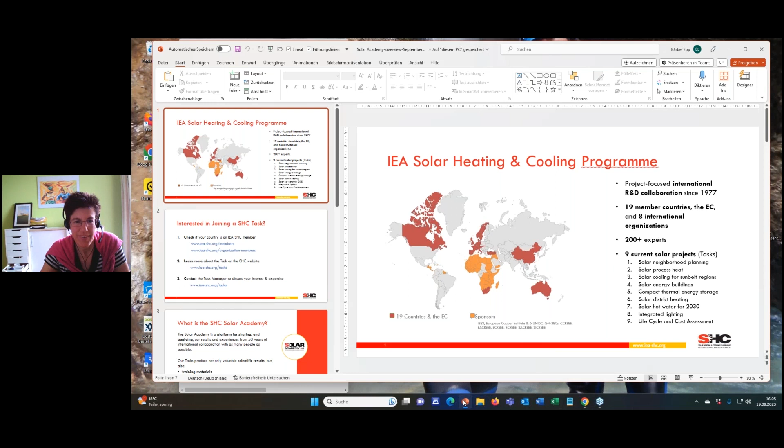Before we start with the real topic, I will give you a brief introduction into what is the IEA Solar Heating and Cooling Program. It's a fairly large international R&D collaboration program with 19 member countries and 8 international organizations. Around 200 experts, mostly researchers, but also from industry, group together and work on a number of subjects which are highly relevant for solar thermal. We have listed them here for you. It's solar neighborhood planning, solar process heat, solar cooling, as we have today, solar energy buildings, but also compact thermal storages. Solar district heating is a big topic, but also thermosiphon systems in the Asian world, integrated lighting, and life cycle and cost assessment.

So you see that we cover all these countries which are colored on the map, either by a direct membership of a country or by a sponsor membership. So if you're interested in joining one of these tasks, first you have to check whether your country is a member of the IEA SHC. That you can do on the website because there is a list of countries, and you can just look into this listing and see whether your country is a member.

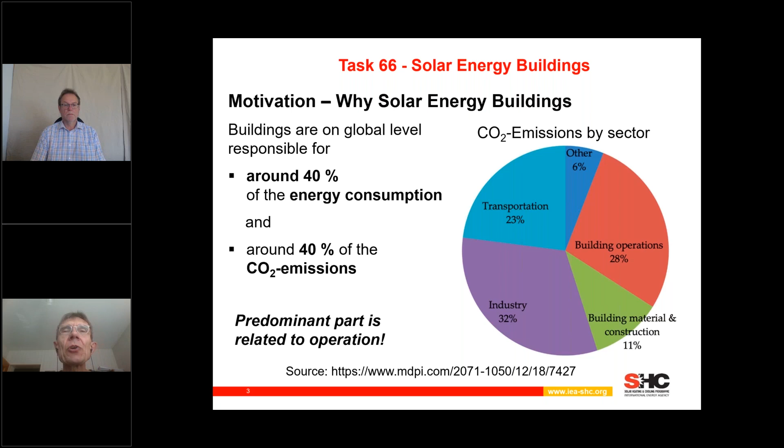So, what are the targets of Task 66? The overall target of Task 66 is to focus on the development of economic and ecological energy supply concepts for buildings with high solar fractions.

Now the question is, what means high? The answer is, as usual, it depends. It depends on two things. One is what kind of solar fraction - is it a fraction for heating, for cooling, or for electricity supply? And the other aspect is, where is the building located?

For moderate climates, like Central Europe, we aim at 85% of the heating demand to be covered by solar energy. And for sunny climates, it's 100%.

With regard to the cooling demand, it's for moderate climates vice versa - 100% for the cooling demand, and 85% for the cooling demand in sunny climates, like Central Australia or Central China. And then with regard to the electricity demand - the overall electricity demand of the building, for operation of household appliances and also taking into account e-mobility if available - we say for moderate climate we'd like to achieve 60% solar fraction, and for sunny climates, 80%.

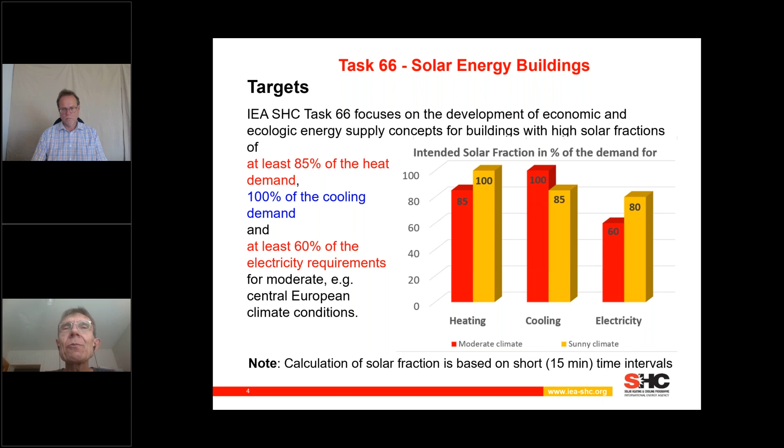Now what is extremely important is that the calculation of solar fraction is based on short time intervals. So we look at 15-minute time intervals. It's not an annual energy balance, where you could easily achieve more than 100% if you have a big PV system and a heat pump, but this doesn't really help. So we look at short time intervals, and there we aim at the solar fractions mentioned here.

So who is we? We are a team of 30 to 40 experts that usually participate in our task meetings. Participating countries more or less cover representative areas of the globe. So we have, of course, a focus on Europe with Austria, Germany, Switzerland, Poland, Belgium, Albania, UK. But we also have participants from Australia, India, the US, Mexico. I think it's really a consortium that covers all climate zones relevant to countries.

And up to now, we've had 5 meetings. 4 of them were virtual and 1 was physical. The next physical meeting is approaching - it will be on the 9th of October this year in Graz, Austria, a very nice city. And if you are interested in joining, Bärbel just mentioned at the beginning how to join an IEA task, so you are very welcome to do so.

How is our task organized? It's organized as typical tasks are organized. Duration is 3 years, so we have a bit more than 2/3 of the time behind us - the end of the task will be in June next year. As already mentioned by Bärbel, I have the honor to manage this task, and task administrator is my colleague Claudia Scholl-Haaf, also working at the University of Stuttgart together with me.

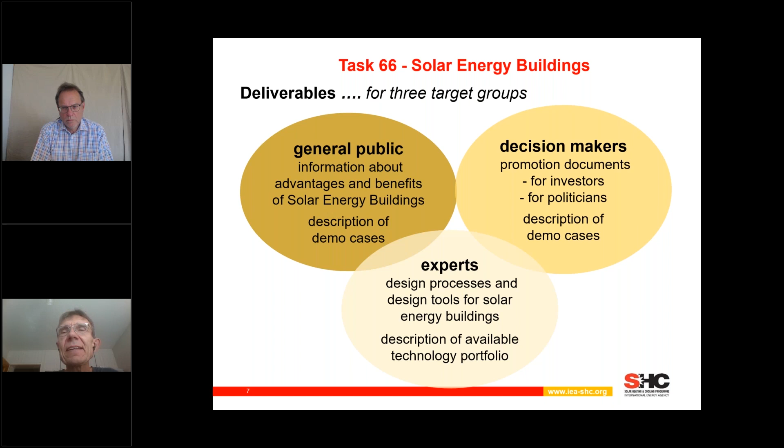So that's from my side, just to give you an overview of what we are doing, why we are doing this, and what is the outcome. And now I'm happy to give the word and the screen to Frank, who is talking about subtask A.

Yeah, thank you, Harald. Harald, I need the slides. I can't see the slides. I need the Freigabe again. Milia, can you? Yeah, okay, perfect, thanks. So there it is. Some technical problems, but very quickly solved.

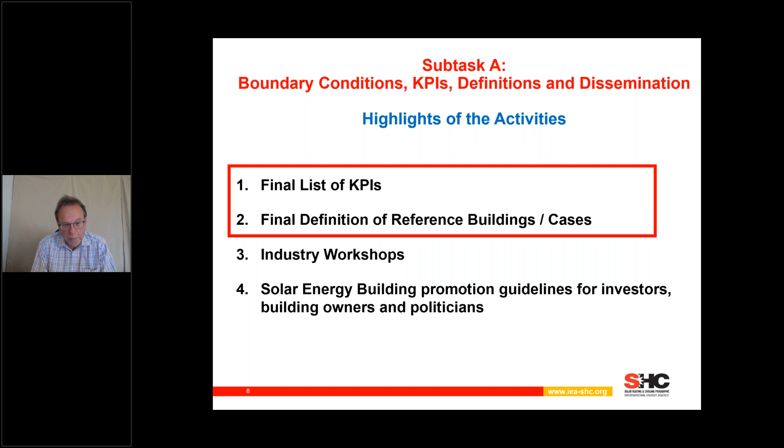As A is usually the first letter in the alphabet, subtask A is the first subtask presented today, and as the first subtask of our task we have some results already, some deliverables, as planned. It's my pleasure now to present these highlights of the first activities: KPIs, key performance indicators, and reference buildings. There are two more activities in subtask A: industry workshops, which I'll come back to later because this is an ongoing activity over the whole task, and the target groups mentioned by Harald, investors, politicians, building owners. We will work out guidelines, which will be one of the next working packages.

Next slide, please. Coming to the key performance indicators, the KPIs. KPIs are known, of course, and are used in many fields of science and also in industry, in energy management, and so on. So we defined here the most important KPIs for our solar energy buildings. Why did we do that? Because we want to evaluate and compare different buildings, and not only buildings. Our target is not only the single building, but also building blocks, communities, small settlements, and the KPIs are worked out for evaluating and comparing these different kinds of buildings, and also the different concepts for these buildings and settlements.

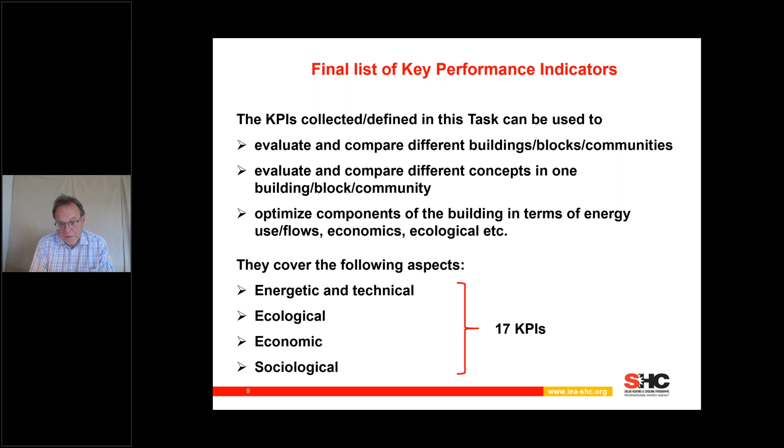And finally, we can also optimize components in these buildings in terms of energy flows, economy, but also ecology. You find all these in the KPIs. We have not only energetic and technical KPIs, but also ecological, economic, and sociological ones, meaning regarding the users' behavior. Altogether, 17 KPIs are listed. We have a draft publication already, and I guess it will be published soon, but it's available on demand. Next slide, please.

Maybe some of you think this is only for scientific purposes. No, it's also supposed to be used in reality, and also for deciders like politicians or planners. Here we took into account all the energy flows that can be there in buildings and building blocks, and usually we do not have all this energy flow, so it will be simplified much, and then these formulas are easy to use.

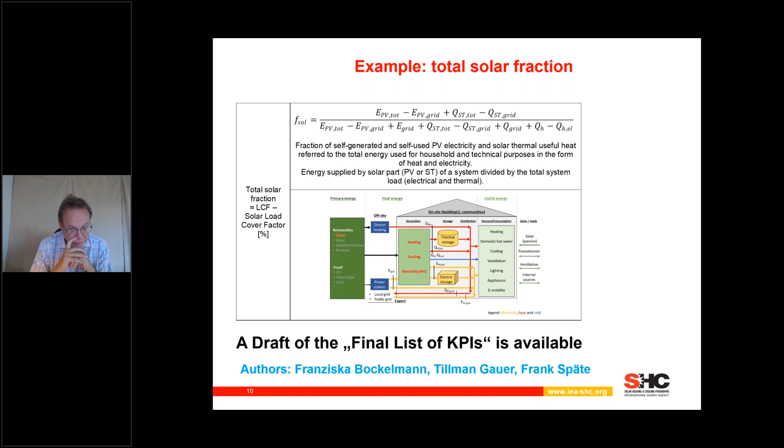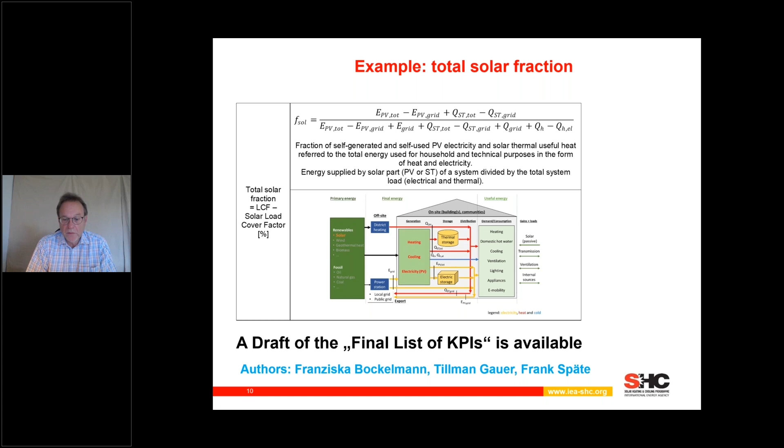As Harald mentioned, we are a group of experts, and all this was worked out within a group of roughly 10 experts in subtask A. Particularly Franziska Bockelmann, Tillman Gauer, and me were working on this KPI list, which I should mention. Many thanks to the authors and the experts that worked on this topic.

Next slide, please. Come to the next point, that are reference buildings. Reference buildings, also here we do not look only for single buildings, but also building blocks and communities. So the same thing, same target buildings.

First, on the basis of such a reference, which is clear and comprehensible in the boundary conditions, we can compare different energy supply concepts very well. We can also elaborate reasonable energy supply concepts for our targeted buildings, building blocks, and communities. And we can validate and calibrate simulation models based on these reference buildings.

So there are good reasons for defining reference buildings, which was not so easy. We had a lot of discussions on that, which is quite complex. We found out two possible methods: one is defining a reference building worldwide, or a group of reference buildings worldwide, joint, or country specific.

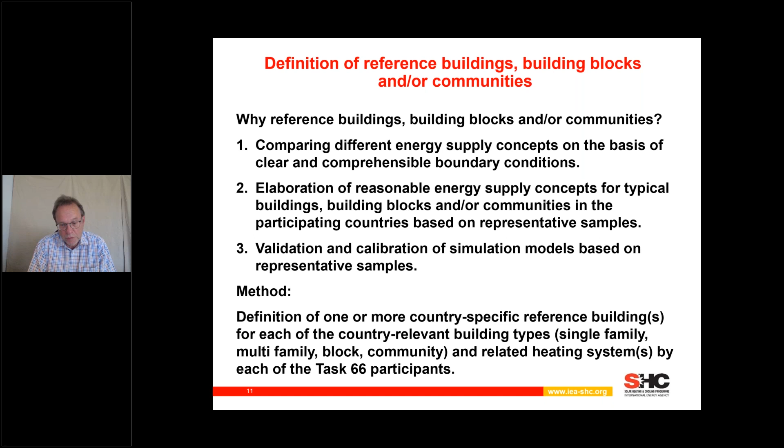Discussing all the pros and cons, we came to a definition of country-specific reference buildings. Next slide, please.

Here are the reasons for that, why we defined country-specific reference buildings. Basically, it's because we have different boundary conditions in each country with different building materials, different heating, cooling, HVAC systems, and so on. So it does not really make sense to define a worldwide reference building, but more country specific.

Whereas it's possible to put, let's say, neighboring countries of the same climate conditions together and have the same reference buildings for those regions. And here you can see, as I said, the reasons for us to define this. And what we have done is we have created a table.

An Excel table, with all the materials, like for example U values of the building envelope, defining the heating, cooling system, the ventilation system, and so on. So if you want to define your reference building in your specific country, you get a tool, this Excel table, and you can insert what is specific in your country.

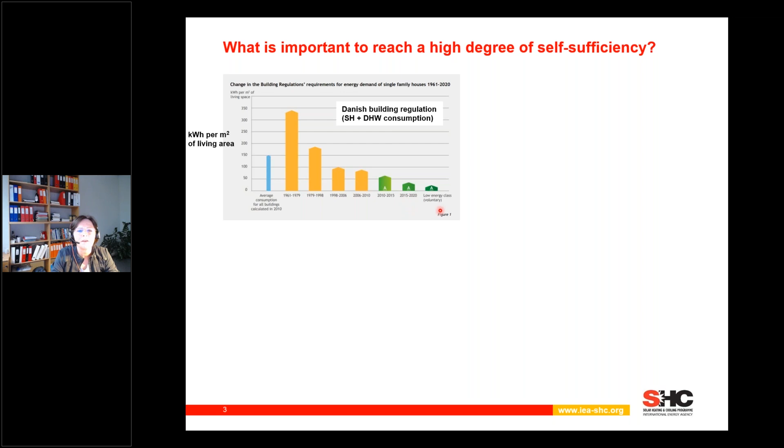So this is the mandatory demand for the energy demand of the building today. But we also have in Denmark a voluntary energy class, so I'll focus on these two energy classes. For that we have defined two single-family houses, one for the mandatory energy class, which is this one, and one for the voluntary energy class. They have 2 residents each.

And then we want to apply these technologies here: solar thermal, PV, heat pump. We want to apply a combi tank with 2 temperature levels, battery, and we also applied tracking on both the solar thermal and the PV panels. The investigation takes place in a Danish climate, which is a temperate climate. We are pretty far north, so we have very long light summers and very long dark winters. We actually have 4 seasons.

Defining these 2 buildings, for the mandatory one we have an energy demand of 7,300 kilowatt hours per year, divided between energy demand for heating, domestic hot water, ventilation and so forth, plus the electricity demand for the consumer. For the voluntary class, we have an energy demand of 5,100 kilowatt hours per year. The electricity demand stays the same—it's the same house with the same inhabitants, just better insulated—so the energy demand for space heating is reduced, while domestic hot water stays the same.

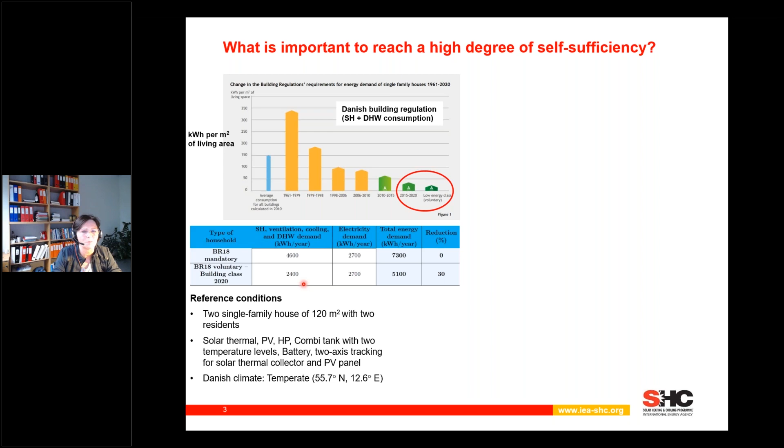So to investigate, we made a Polysun model of the systems. You can see here all the different technologies are applied: PV, battery, the consumer, solar thermal, and a heat pump, and this combined storage tank with a domestic hot water volume in the top and a space heating volume below. We also defined the self-sufficiency, given as the total energy demand minus the electricity bought from the grid, divided by the total energy demand.

And the results show that in both cases we reached 90% self-sufficiency, which is good. For the mandatory energy regulation, we came to a solar thermal collector area of 54 square meters, 3 kilowatt heat pump, 48 square meters of PV, and 21.4 cubic meters of thermal storage and 30 kilowatt hours of battery.

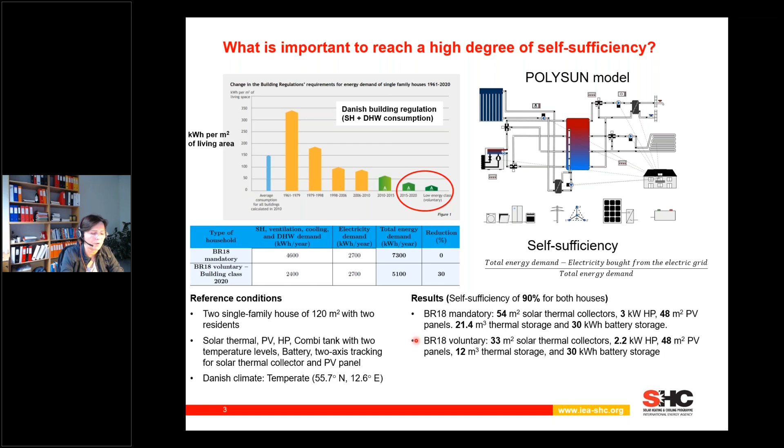If we go to the voluntary class, the heat pump changes a little bit. The heat pump is actually reduced, but the PV and the battery is the same. And the thermal solar collector area is reduced to 33 square meters and the storage to 12 cubic meters. So reducing the energy demand by 30% leads to a higher reduction of the thermal components.

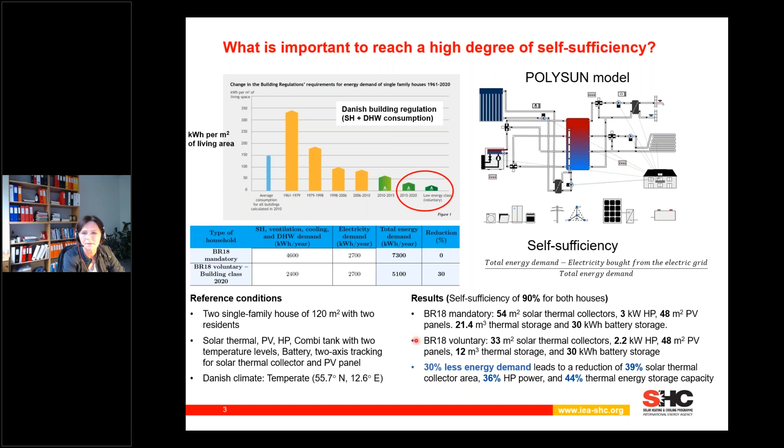So how to cover the last 10%? Here you see the number of hours with the low electricity spot prices in Denmark. The price here is 0.0135 euro per kilowatt hour. And you see the number of hours per month for the different years from 2014 to 2022. And we also see the monthly average, this line here. To make it more clear, I put the numbers up here. So this is the monthly average where we have this low electricity price.

But if we accept a higher electricity price, what happens then? As expected, if we accept a higher electricity price, shown on the x-axis, we get more hours every month where we can utilize cheap electricity. And this is the electricity that we should use to cover the last 10% of the energy demand from the previous slide. These prices are from the European power market, Nord Pool.

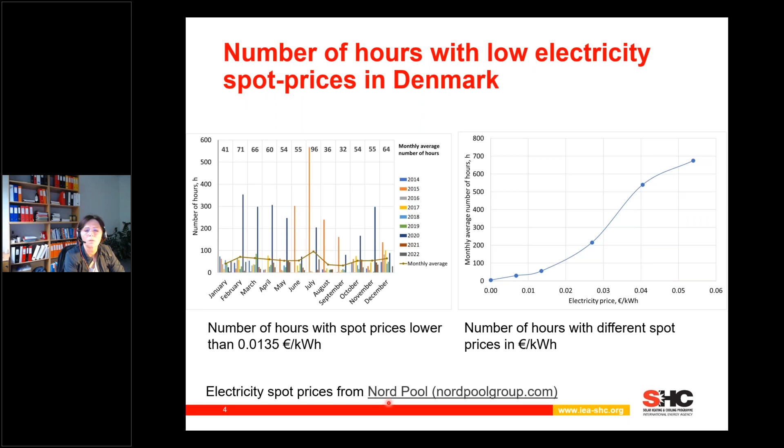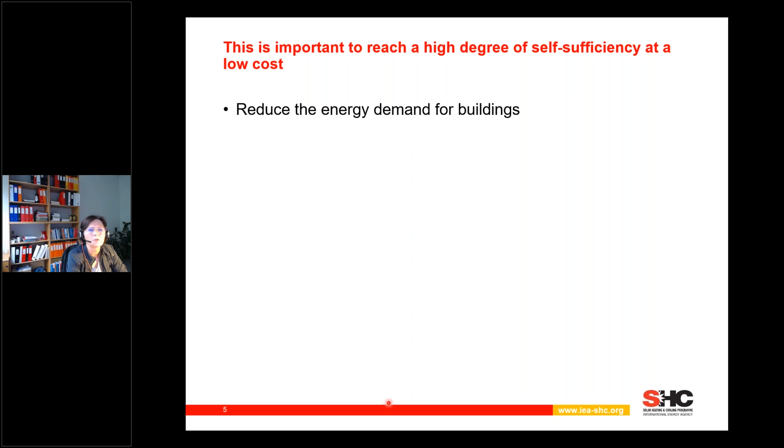So according to this investigation, this is important to reach a high degree of self-sufficiency at a low cost. Reduce the energy demand of buildings and use low temperature heating systems. It could be floor heating or oversized radiators. Floor heating will be used in new buildings, but oversized radiators you get once you insulate the building envelope very well and keep the heating system there. It's already an oversized heating system, and then it's usable for heat pumps that operate most efficiently at low temperature levels.

Then you should use solar energy to cover the energy demand, because solar energy is purely renewable, 100% renewable. And then you should reduce the electricity consumption when renewable energy is limited, and that is very easy because in that case the electricity is very expensive, so you don't want to use it there. To shift the use to a period with cheap electricity, you could use energy storage.

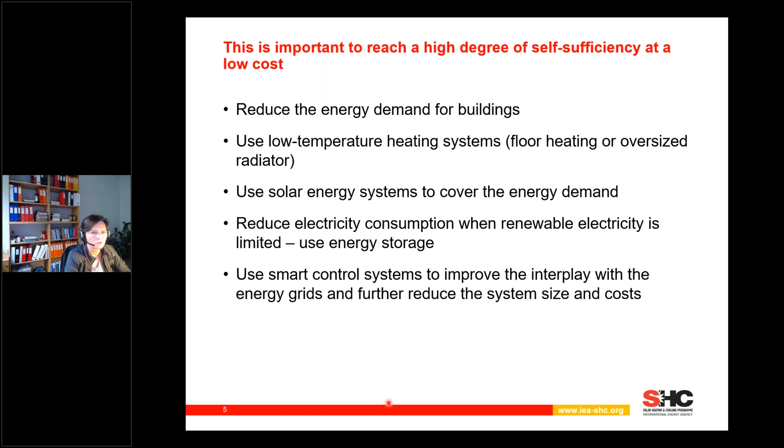And finally, use a smart control system. A smart control system should be based on forecasts of the electricity price and of the solar radiation, and perhaps also of the consumption. These forecasts are given more than 24 hours ahead. So you need a smart control to figure out how to provide all the energy needed in the system in the cheapest possible way. This will, of course, reduce the system size and the costs.

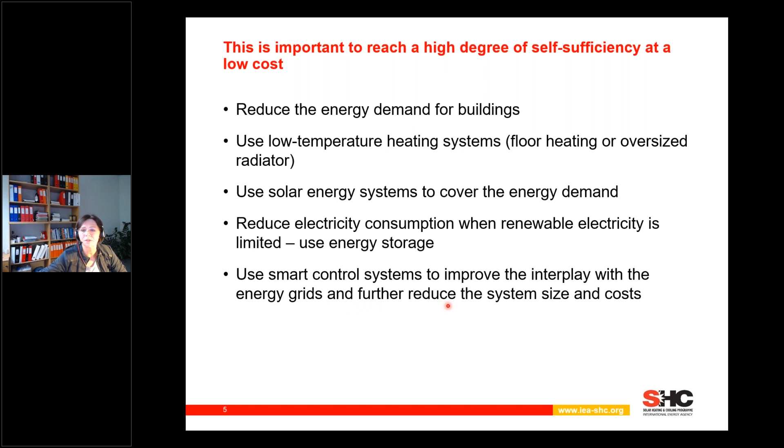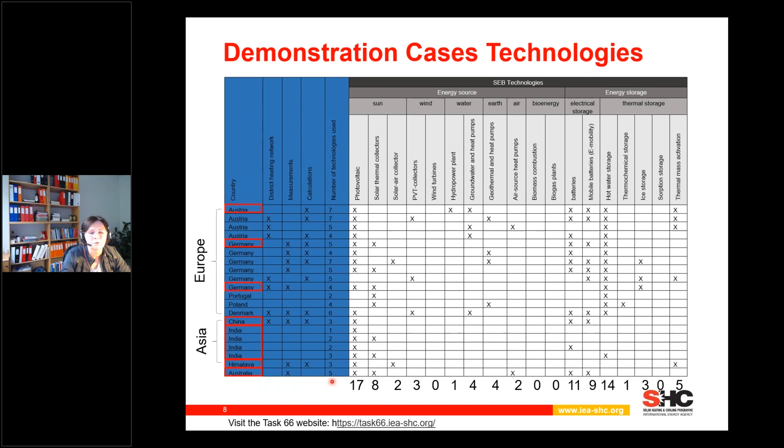And I just want to go back, sorry, because I forgot to mention here that if we look at the number of technologies used, we can see that in Europe the number of technologies used is between 4 and 7. And when we come to Asia, the number of technologies is less, it's 1 to 3. And then we have Australia, which is more similar to Europe than Asia. So we are back here.

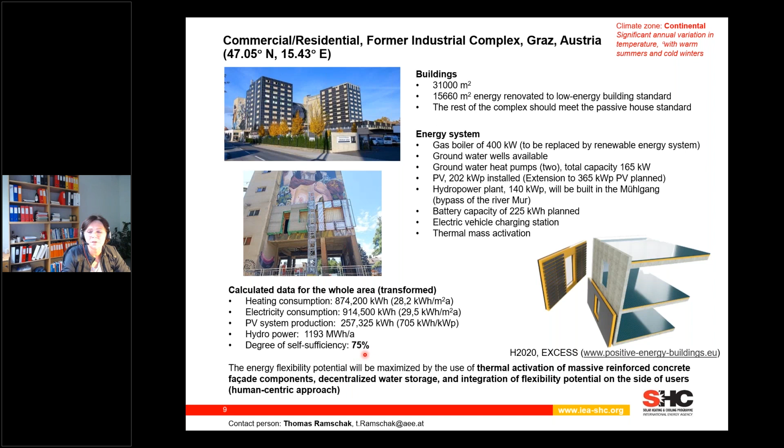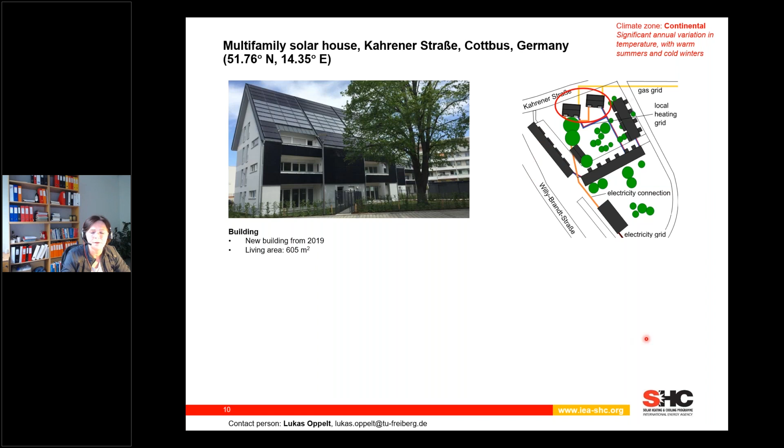The next case is a multi-family solar house in Germany, also lying in a continental climate. And we see that the two buildings in question are located up here, thermally connected to the other buildings in the neighborhood. But we will only focus on the energy system for one of the buildings, and it uses solar thermal collectors, heat storage, a gas boiler, PV, battery, and geothermal collectors for cooling, and also electrical vehicle charging stations.

And the performance of this building is that on the electrical side, it has 93% of self-sufficiency, and on the thermal side it is 83%. So those are actually really impressive high numbers. And these are measured data.

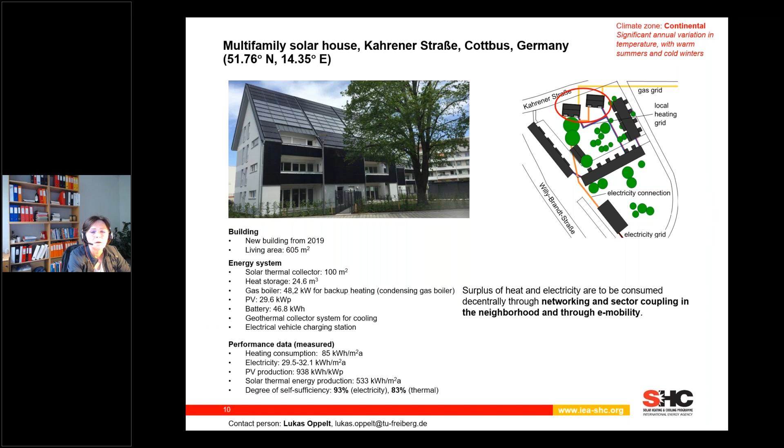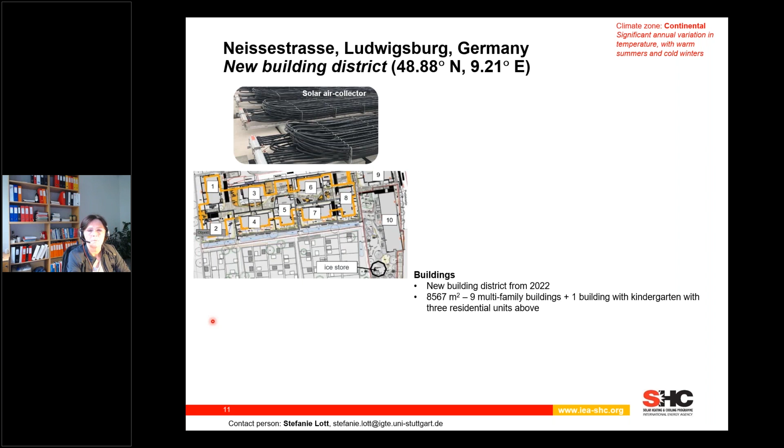The next system is given by Stefanie Lott from the university in Stuttgart. This system has floor heating and floor cooling in the building, and then it uses a heat pump and thermal storage, and domestic hot water is prepared by instantaneous water heaters at each tapping location, and then it has a centralized big ice storage. This is the one you see here.

So we have 10 buildings here, and this is where the ice storage is located. This ice storage is connected to all the heat pumps that are located in each of the buildings. And this is a sort of low temperature district heating network called an energy net, where really cold temperatures are circulated around, so they're not directly usable. They need to be lifted in temperature by means of a heat pump. So this is the system here.

And the performance data is a self-sufficiency of 53%. It's not so high. On the heating side, it's very fine, but on the cooling side, 33%, and on the electricity side, 28%, is not so high.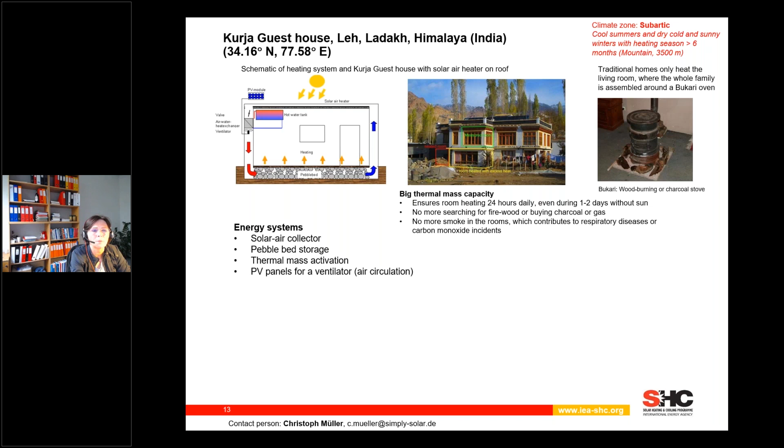The next building here is from Christoph Müller from the company Simply Solar, and it's a system located in a mountain region, Ladakh in the Himalaya, which lies in India. And you see the system concept up here. So the energy system consists of solar air collectors, not thermal collectors, and it has a pebble bed storage, and then it uses thermal mass activation, and it has a PV panel to operate the ventilator here.

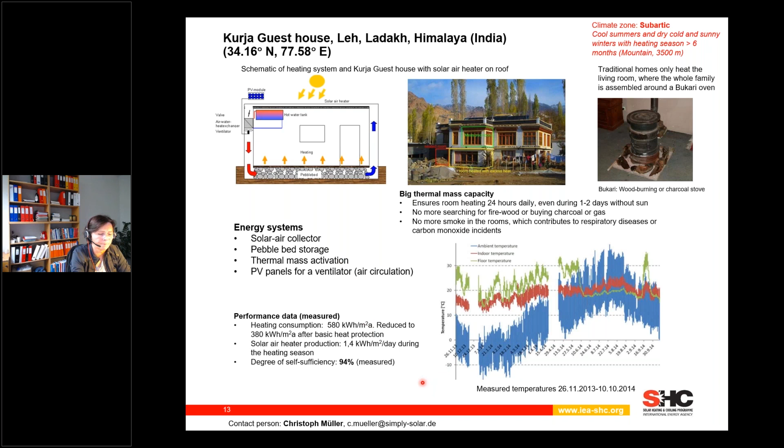Then we come to India. And here I included all the systems. They are actually somewhat alike. They all use PV for electricity production, and then they have a diesel generator for electricity backup. The systems operate a cooling system, and they also cover a part of the electricity consumption. We have so far no measurements from these systems, but they will come in the near future, and I'm very excited to see the performance factors from these systems.

Then there is the system from Australia. It's a single family house, and the climate zone is a Mediterranean climate, and the energy system consists of PV panels, battery, heat pump and electric vehicle charging station. And apart from the energy system, there are also technologies that make the house even more sustainable. And the performance data show a self-sufficiency degree of 89%, which is also very high.

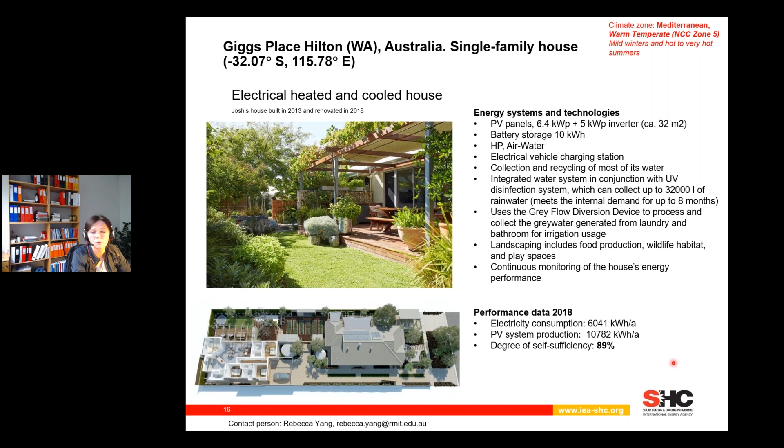Then for the trends, in Europe, we see that systems with a mixture of a high number of different technologies are found. So they use PV, heat pump, battery, solar thermal, energy network, ice storage, advanced control strategies, and thermal mass activation. In Asia, we see systems with a few different technologies, and these are typically PV, battery, solar thermal, and thermal mass activation.

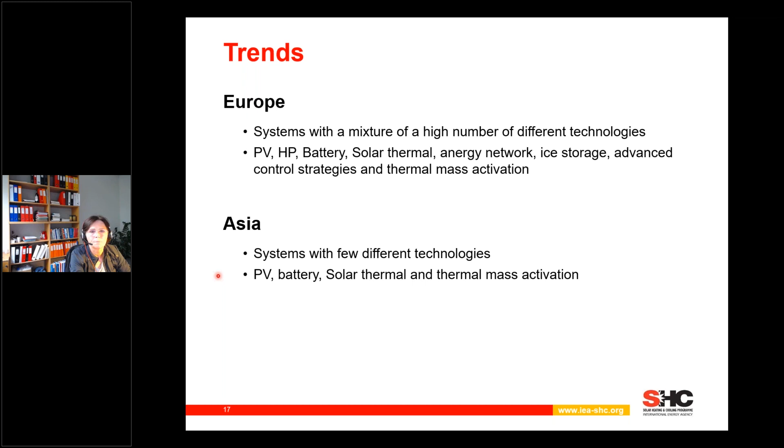Thank you very much. This was exciting to have a turn around the whole world and see different solar energy buildings and also performance data, which is always different from just looking at architecture. Thank you very much. So we have another speaker following Elisabeth, also with some, I think, case studies.

It's Michael Gumhalter. He has been a scientific researcher at AEE INTEC in Gleisdorf in Austria for 3 years. His focus is on system integration of renewable energy technologies. He is originally an electrical engineer with broad experience in software development and thermal building simulations. He is developing model-based control methods for buildings and renewable energy systems. And he will talk about current and future technologies and components for solar energy buildings. So, Michael, the floor is yours.

Perfect. Michael, you're muted. Oh, sorry, slight technical problems there. So, can you hear me now? Yes, now it's perfect. Thank you. Thanks. So, yeah, hello, and thank you for the nice introduction.

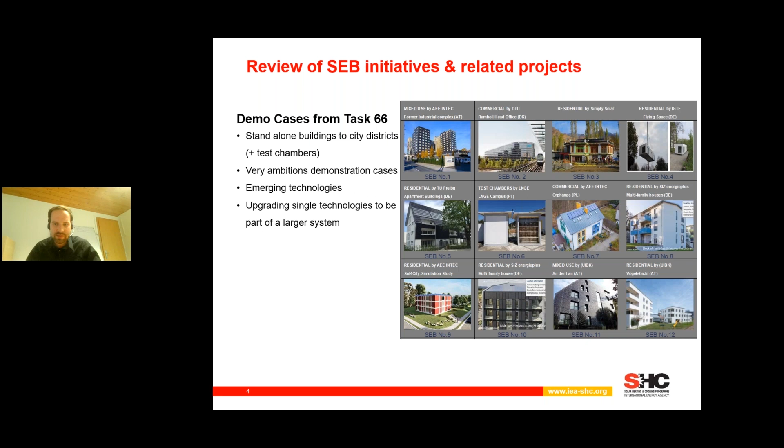So there are technologies included which are not yet in the market, which have a lower TRL and are tested also, for example, on lab scale. And we also have a lot of systems there which are still trying to be integrated into larger systems. So this is the focus of those sample buildings.

And then we have the second data source, which are 126 solar energy building cases coming from the national and international funded projects. These are projects like smart city projects funded by the European Union, projects which deal with positive energy buildings, but also projects from national funding programs which fund investments in renewable energies to reach high solar fractions.

The criteria or the definition of Task 66, as we heard in Harald's presentation, is very ambitious, and not all the cases fulfill these criteria. This does not make them less ambitious. So they are still highly resource efficient and have a high share of renewables.

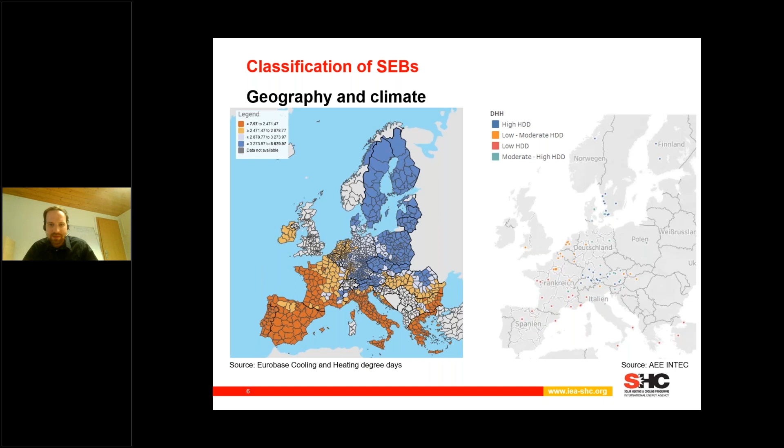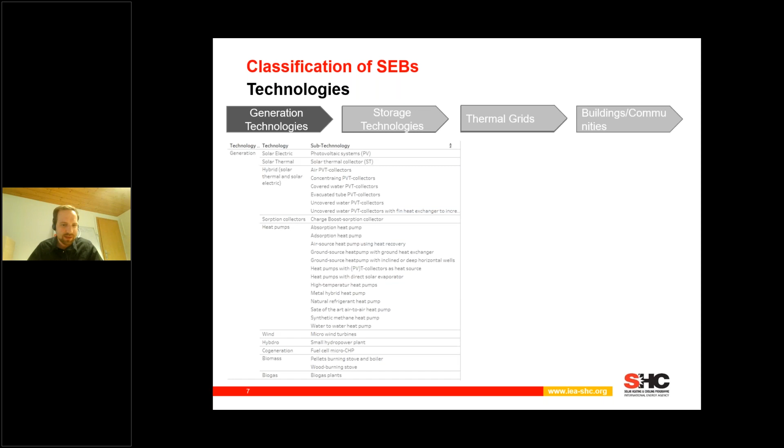For the generation technologies, you have here the typical suspects for solar generation: photovoltaics and solar thermal collectors. But we also have a lot of heat pumps in there, and any kind of renewable electricity generation, also biomass for the high heating degree day zones. If we go to storage technologies, again, storage for electricity is most prevalent, typical battery storage, but we also have, of course, the thermal storages, typical hot water tanks, but also chemical storages and others.

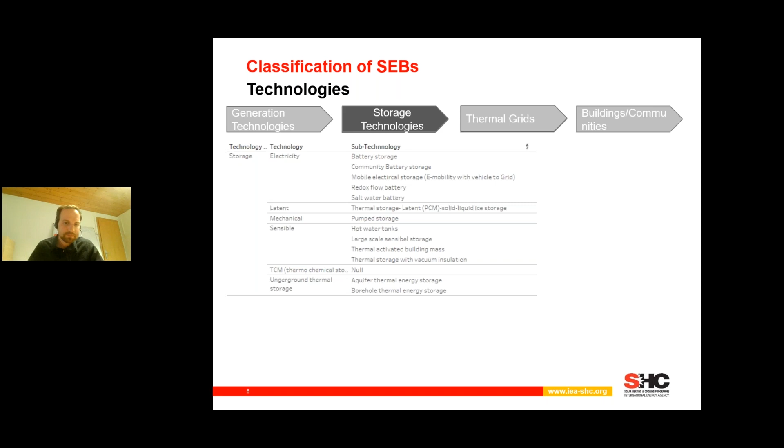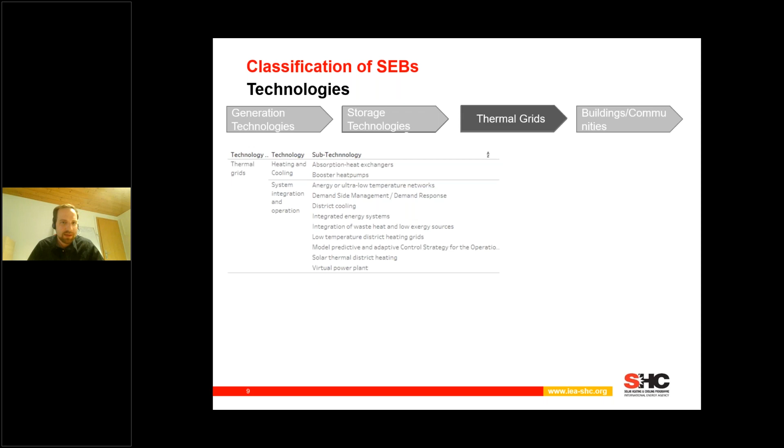For the thermal grids, we also have a big variety of possible variations. So we have classical heating, we have low temperature energy networks, and we also have topics that have to do with a lot of control and modeling, so something like virtual power plants, just to mention a few. For the topic buildings and communities, we have high-tech solutions like thermal regulative walls and windows, but we also have more available stuff like thermal mass activation, and we have a lot of system integration, so a lot of control and smart energy methods registered as well.

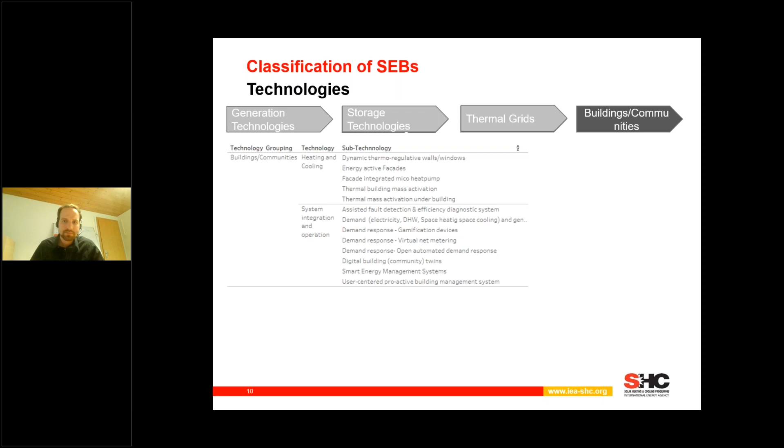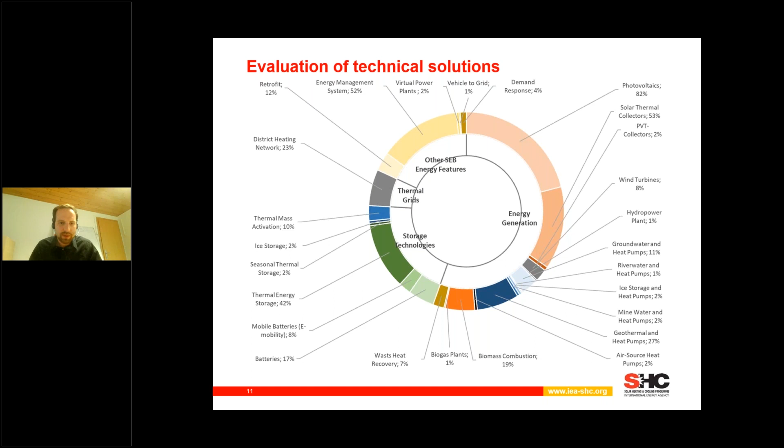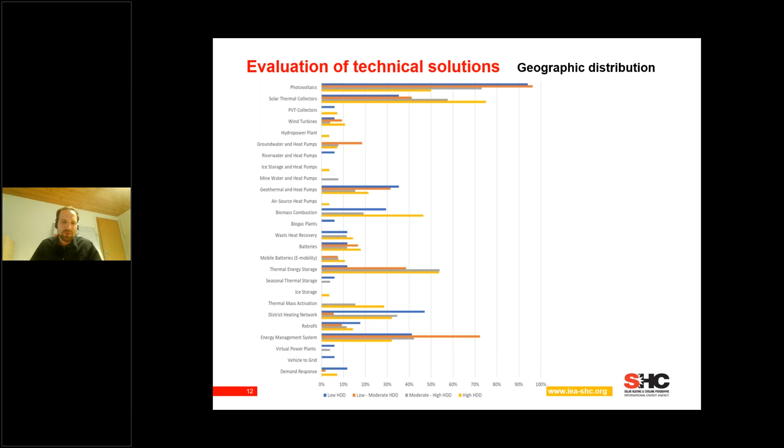What we had so far was more like the state of solar energy buildings, the current technologies. Now I would like to move more towards future solar technologies. For all these recorded technologies, we did a market potential analysis where we looked at entry barriers, political environment, the internal environment, and the market size and growth rate. Out of these four ratings we formed the total rating, and finally we also assessed the probability that the technology will be a relevant option in the next 3 years, which is an expertise-based estimation for every one of these technologies. This assessment shows which of these technologies will be rising in the next 3 years. We do not want to exclude any technology that may currently have a low TRL and still high costs—it's just a perspective on which ones will move fast in the closest time.

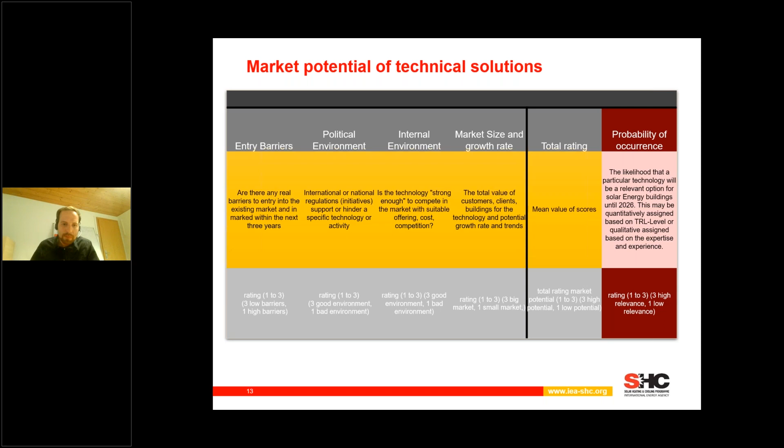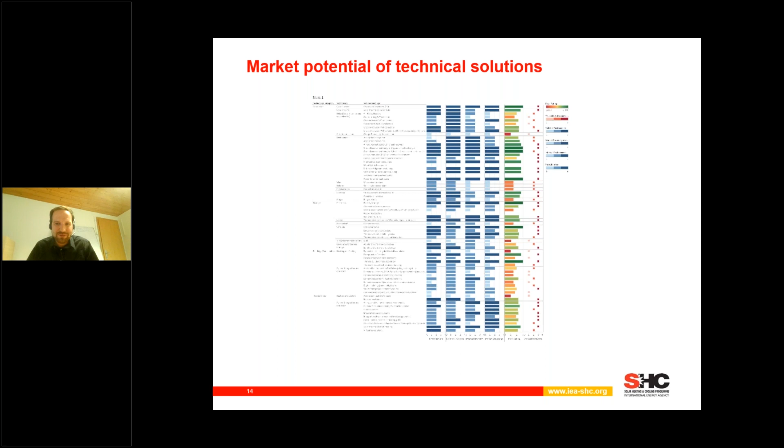So if we do such an analysis and view a table like this—if you see a table like this, you can probably see that you can't see anything at all. So my colleague Thomas gladly developed the technology radar I want to show you next. On this radar we've marked all the technologies we found, and with the dot size we mark the market potential of the technology, and with the color, the expert rating—what's the prospect for the next period. There is clustering on the topic of the technology, and there's also a rough time frame included. The closer to the center the technologies are, and the greener they are, the higher the implementation chance, or the chance of rising shares for that technology in the following years.

If you're interested in this radar and the underlying data, they will be published within our next project deliverable, so probably within the following month.

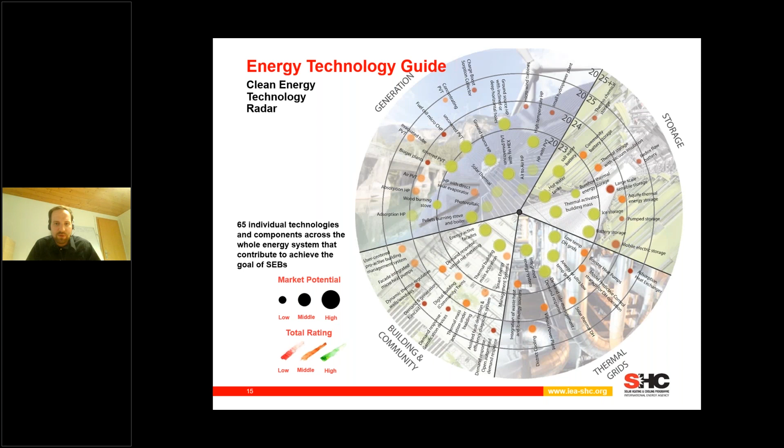Additionally to the existing technology radar and the data I've shown you, there is also an outcome still to be done. We are planning information about each solution we found here, or selected solutions, and this will be presented in short fact sheets, which will hold a description of the solution, some examples, maybe with images of current applications, and also references to scientific literature, journals, or relevant documents.

With this slide, I am already at the end of my presentation on subtask D. I can say thanks to Thomas, especially for doing a lot of the research there, and also thanks for listening. I'm happy to answer some of your questions, or looking forward for you to contact me.

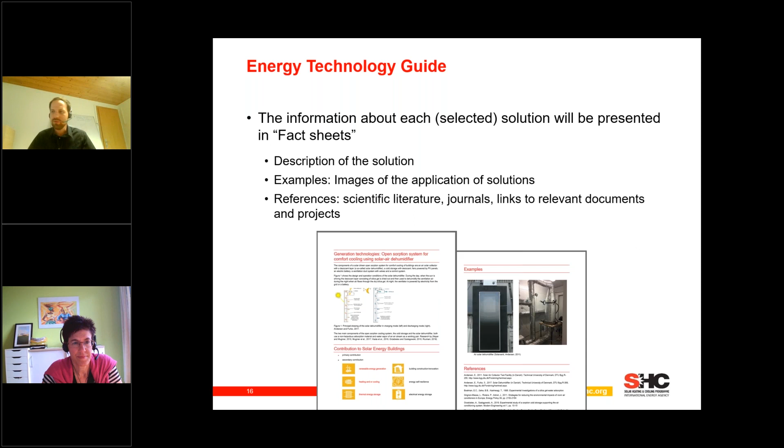Okay Michael, great. I really like the technology radar as one of the outcomes of the task and the many discussions, looking at more than 100 demonstration projects around Europe.

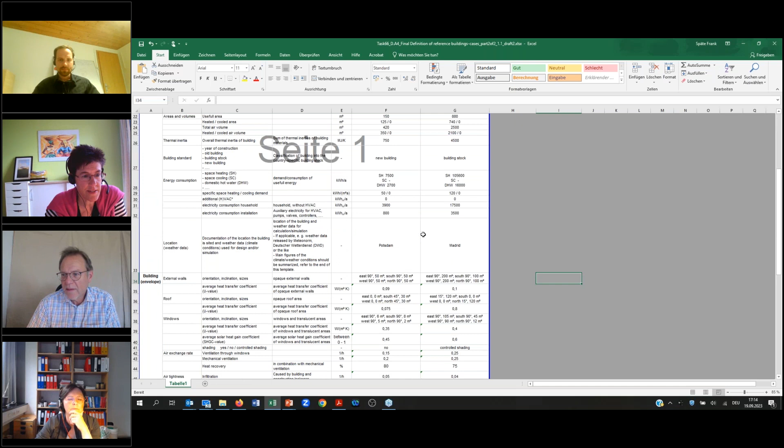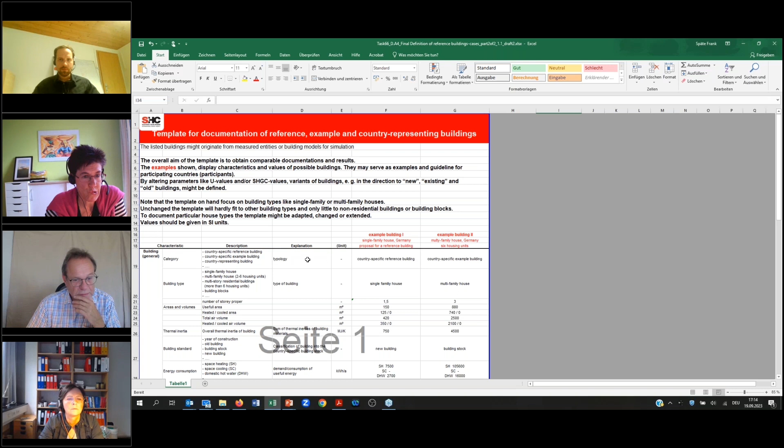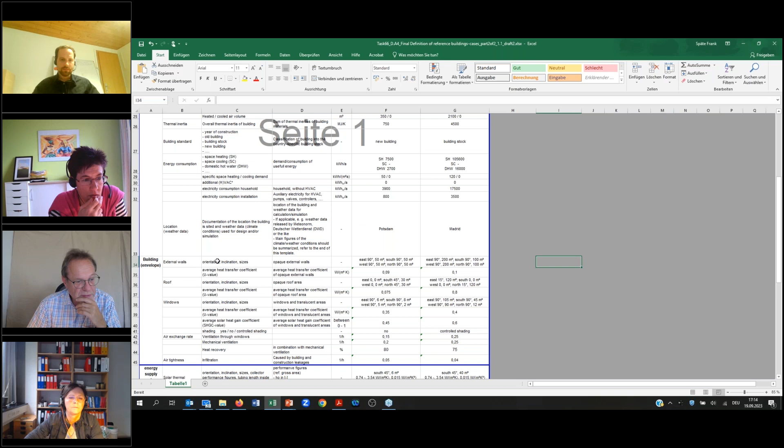Yes. So as I mentioned in my presentation, this tool, which is a simple Excel table, you can see here how the different member countries can define their reference building. So here are data about the building in general. Then you have data about the building envelope, which you can insert, the energy supply system, and so on. So it's everything that a building consists of.

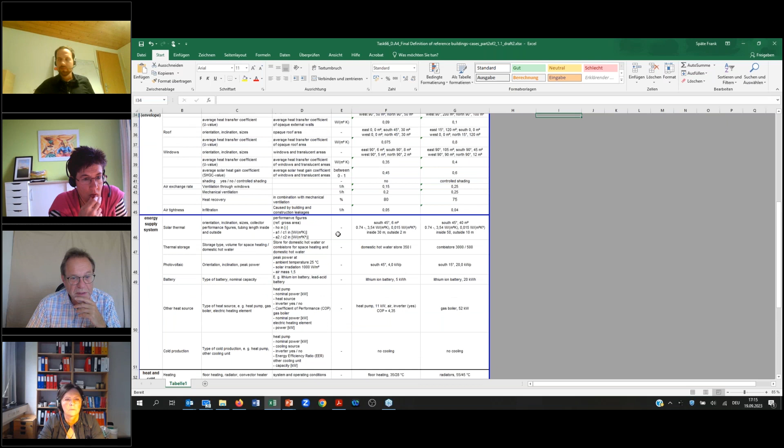And on the right two columns, there are some examples for Germany, but that can be filled in for any other country as well. So, coming back to the question, it should be a more or less practical, real building, but maybe you don't find it somewhere where you can go and say, this is my reference building. It is a question of defining it, and it should be close to reality.

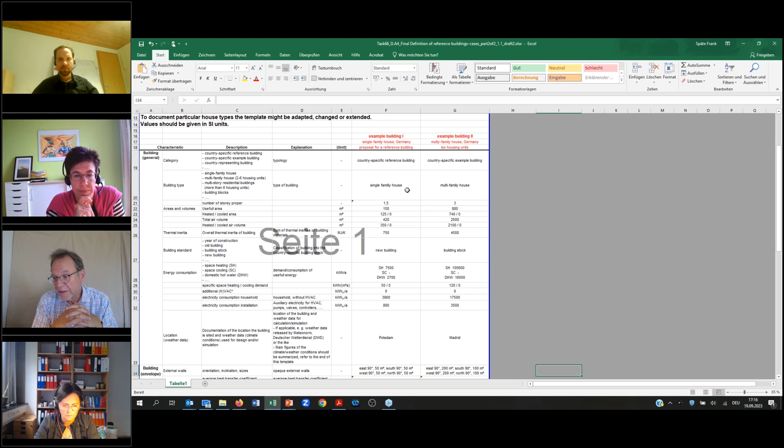Of course, it can be used for simulation, and it can be measured also. It can be one of the examples that is shown in the other subtasks, inserted here, maybe varied in different values, and made into a reference building. So it should be something that you can work with.

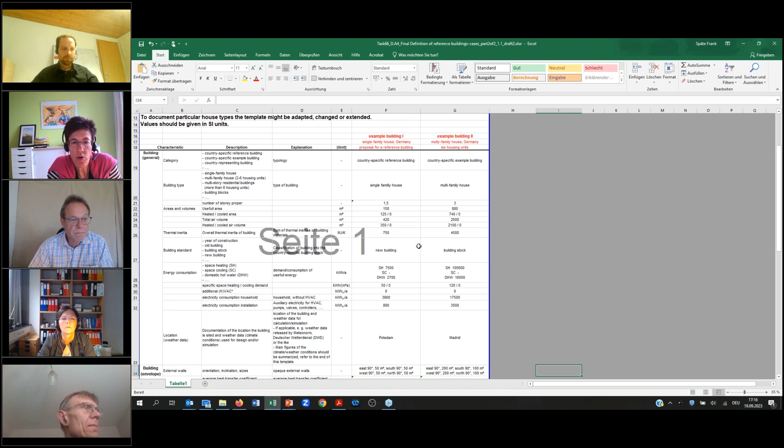I think regarding this Excel sheet, there was also the question of how this can be quoted, how this can be used, and whether this is publicly available. Well, this has to be defined by each member country or institutions there. So we give the tool, but we did not define reference buildings for all the countries and regions.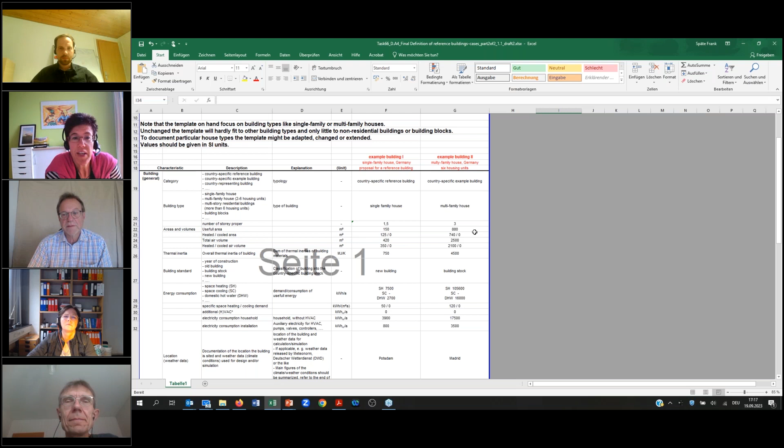Okay, good. Then thanks for sharing. I think that was very enlightening. So then we have questions to Elisabeth.

First, somebody wants to know about the Denmark models that you showed. Was the 90% self-sufficiency based on a 15-minute interval or an annual basis simulation? Can you hear me? Yes, that was based on the short time step interval. So it was not on an annual basis.

Polysun uses different time steps between 1 second and several minutes, depending on whether something is happening in the system. So at night, when nothing is happening, it goes for longer time steps, and during the daytime, where a lot happens, it can go to the very small time step of 1 second. So that's the true self-sufficiency rate.

Okay. And in your example, it was mostly solar energy, because somebody is asking whether heat pumps were at all part of your solutions in your demonstration buildings. Yeah, the technologies included were PV and battery for the electricity consumption, both of the appliances and of the heat pump. And then there was solar thermal to heat the storage tank, and a heat pump also to heat the storage tank. So all those technologies were included.